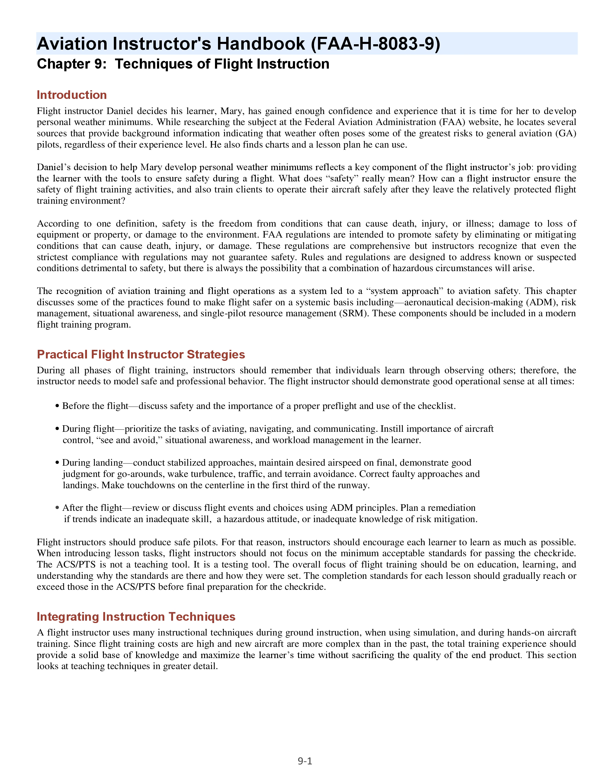Integrating instruction techniques. A flight instructor uses many instructional techniques during ground instruction, when using simulation, and during hands-on aircraft training. Since flight training costs are high and new aircraft are more complex than in the past, the total training experience should provide a solid base of knowledge and maximize the learner's time without sacrificing the quality of the end product. This section looks at teaching techniques in greater detail.

Ground instruction. Ground instruction can be highly effective if it follows an overall plan designed to prepare the learner for flight. In Chapter 7, Planning Instructional Activity, Figure 7-2 shows a ground lesson that includes clear objectives. However, ground training objectives should be related to flight training objectives whenever possible. When elements are taught on the ground as theory, their practice and application is also experienced in the air. The instructor should point out the connection between the theory and practice to maximize the benefit from integrated ground and flight instruction. Figure 9-1. Additionally, ground instruction need not be in the classroom for maximum effectiveness.

For example, conduct a pre-flight using an actual aircraft although initially taught in an academic setting. Additionally, when airspace is being taught, an invaluable reinforcement of training includes taking the learners to ATC facilities where they can see management of the National Airspace System (NAS) from another perspective. Studies have shown that a mix of instructional elements provides the best balance during ground instruction.

Learners who use electronic media extensively are generally not as well trained as those who receive a balanced mix of ground teaching methods that include e-learning, class, and one-on-one instruction integrated with technological tools that support the instruction versus replacing it. Ground instruction is a key element that sets the foundation and is critical to learner pilots becoming well educated and successfully transitioning into the flight environment.

It should be deliberative, supportive of the learner's interwoven flight education, and highly rewarding to both the learner and instructors alike. Use of flight simulation training devices. The FAA separates flight simulation trainers into three specific categories: full flight simulator, FFS, flight training device, FTD, aviation training device, ATD. The National Simulator Program located in Atlanta, Georgia provides for the evaluation and qualification of FFSs and FTDs.

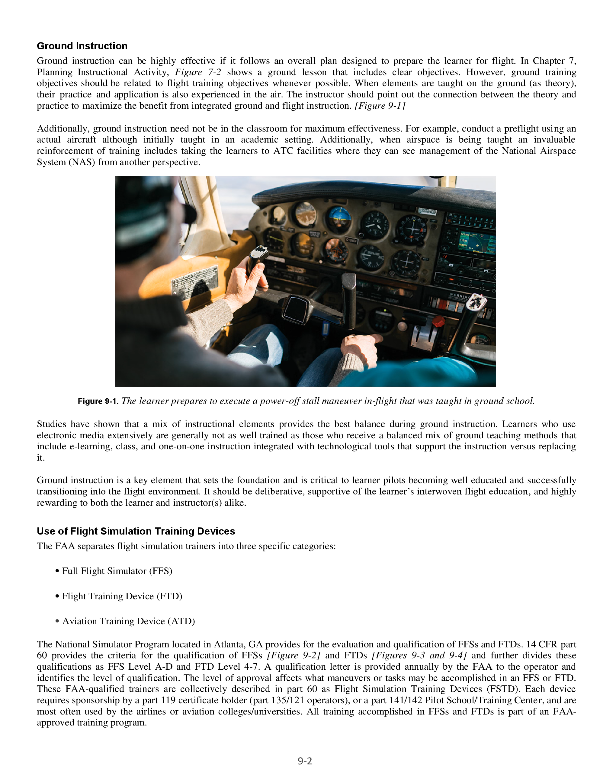Each device requires sponsorship by a Part 119 certificate holder, Part 135/121 operators, or a Part 141/142 pilot school/training center, and are most often used by the airlines or aviation colleges/universities. All training accomplished in FFSs and FTDs is part of an FAA-approved training program. The General Aviation and Commercial Division located in Washington, D.C. provides for the evaluation and approval of ATDs.

Advisory Circular AC 61-136, FAA Approval of Aviation Training Devices and Their Use for Training and Experience, provides the criteria for ATD approvals and use, and further divides them into two categories: basic or advanced ATD approvals, BATD/AATD. The letter of authorization provided by the FAA to the manufacturer specifies the training credits or experience requirements that can be acquired using that model trainer. These training devices are predominantly used by general aviation flight schools providing flight training under 14 CFR Part 61 or Part 141 regulations. ATDs cannot be used for airman practical tests or type rating training requirements.

Integrated training curricula can use an FFS, FTD, or ATD to provide seamless training from the classroom to the aircraft. An instructor initially provides the required knowledge in a classroom environment and then follows with procedural training in the simulator. For example, when utilizing an integrated ground and flight training program, an authorized instructor would initially teach the required knowledge specific to instrument landing system, ILS, design, and the associated flight operations through ground and classroom training. The instructor then provides instruction on aircraft flight procedures and details specific to operations in the National Airspace System. After the learner has gained the required knowledge and understands the procedures, the instructor then adds practicing the psychomotor skills of the task in the simulator.

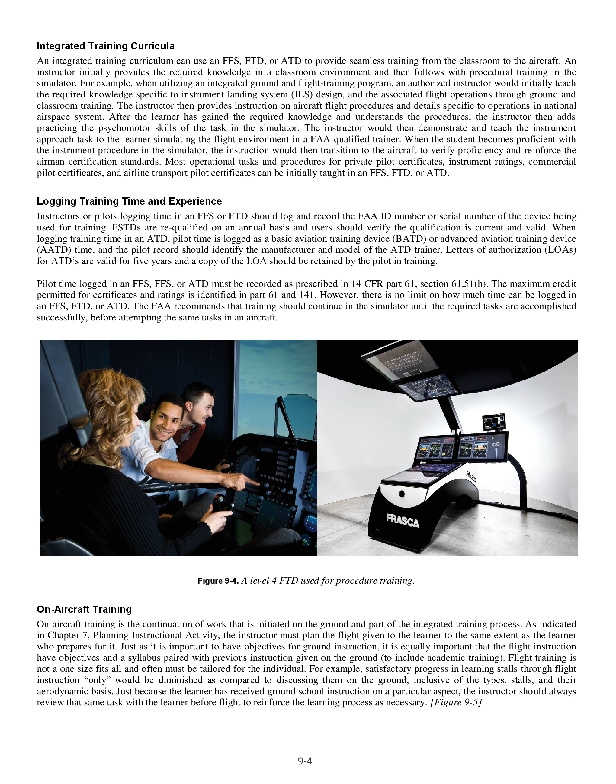Figure 9.5. On-aircraft training is integrated with ground instruction and not autonomously separate and distinct. By pairing flight and ground instruction together, the learner will advance further, faster, and attain more of the educational goals the instructor tries to impart. Demonstration Performance Training Delivery Method.

The demonstration performance training delivery method was discussed briefly in Chapter 5, the teaching process, but the following in-depth discussion is geared to the flight instructor. This training method has been in use for a long time and is very effective in teaching kinesthetic skills, so flight instructors find it valuable in teaching procedures and maneuvers. The demonstration performance method is divided into 4 phases: explanation, demonstration, learner performance with instructor supervision, and evaluation.

Figure 9.6, explanation phase. The flight instructor needs to be well prepared and highly organized to teach complex maneuvers and procedures effectively. The learner should be intellectually and psychologically ready for the learning activity. The explanation phase is accomplished prior to the flight lesson with a discussion of lesson objectives and completion standards, as well as a thorough pre-flight briefing. The instructor presents clear and pertinent objectives of the particular lesson to be presented, based on the known experience and knowledge of the learner. Instructors need to provide details on the lesson content, performance expectations, and evaluation measures.

When teaching a skill, the instructor conveys the precise actions the learner will perform. In addition to the necessary steps, the instructor should describe the end result of these efforts. The explanation phase also should include coverage of appropriate safety procedures. Before leaving this phase, the instructor should encourage learners to ask questions about any step of the procedure that they do not understand. Demonstration phase.

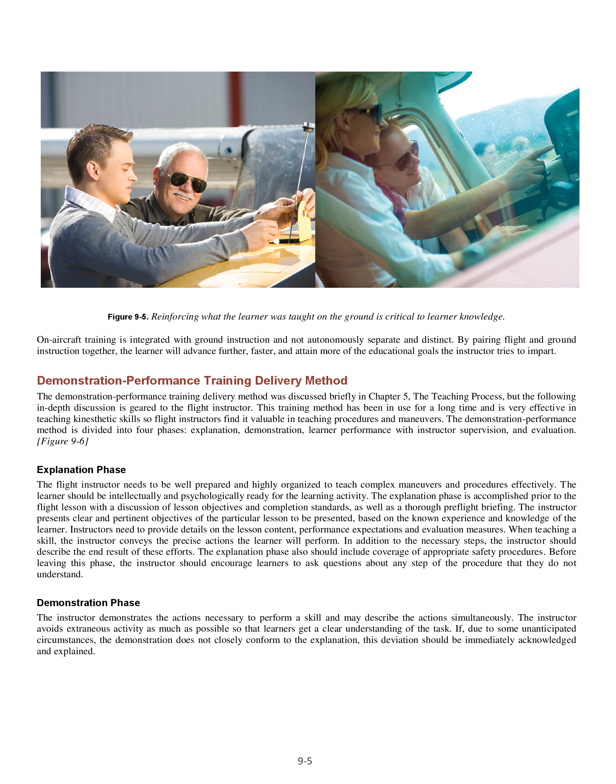The instructor demonstrates the actions necessary to perform a skill and may describe the actions simultaneously. The instructor avoids extraneous activity as much as possible so that learners get a clear understanding of the task. If, due to some unanticipated circumstances, the demonstration does not closely conform to the explanation, this deviation should be immediately acknowledged and explained. Learner performance and instructor supervision phases.

As discussed in Chapter 5, the teaching process, these 2 phases involve separate actions that are performed concurrently. The first of these phases is the learner's performance of the physical or mental skills that have been explained and demonstrated. The second activity is the instructor's supervision. Learner performance requires learners to act and do. To gain skills, learners must practice. The instructor must, therefore, allot enough time for meaningful activity. Through doing, learners can follow correct procedures and reach established standards.

It is important that learners be given an opportunity to perform the skill as soon as possible after a demonstration. Then, the instructor reviews what has been covered during the instructional flight and determines to what extent the learner has met the objectives outlined during the pre-flight discussion. The instructor should be satisfied that the learner is well prepared and understands the task before starting. The instructor observes as the learner performs, and then makes appropriate comments.

Evaluation phase. In this phase, the instructor traditionally evaluates learner performance, records the learner's performance, and verbally advises the learner of the progress made toward the objectives. Regardless of how well a skill is taught, there may still be performance deficiencies. When pointing out areas that need improvement, offer concrete suggestions that help. If possible, avoid ending the evaluation on a negative note.

As discussed in Chapter 6, Assessment, Collaborative Assessment, or Learner-Centered Grading, LCG, is a form of authentic assessment currently used in aviation training with problem-based learning, PBL. PBL structures the lessons to confront learners with problems that are encountered in real life and forces them to reach real-world solutions. Scenario-based training, SBT, a type of PBL, uses a highly structured script of real-world experiences to address aviation training objectives in an operational environment.

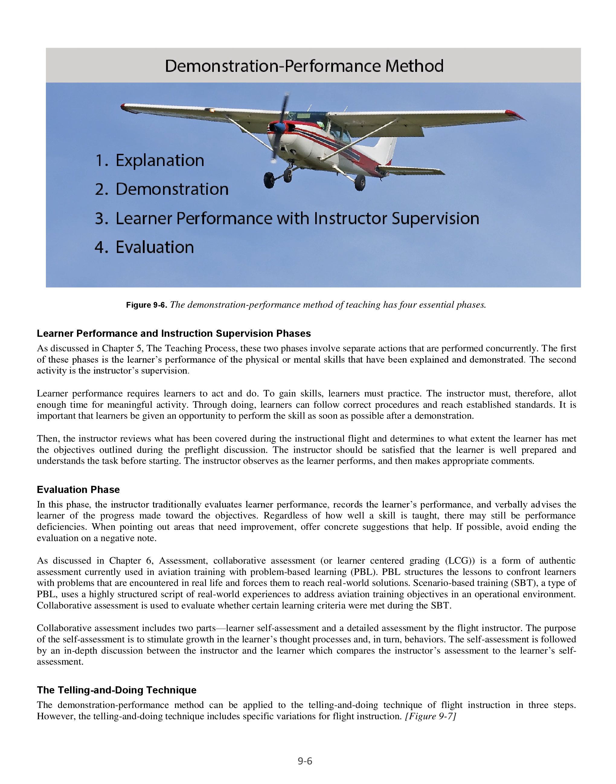The demonstration performance method can be applied to the telling and doing technique of flight instruction in 3 steps. However, the telling and doing technique includes specific variations for flight instruction. Figure 9.7. Instructor tells, instructor does. First, the flight instructor gives a carefully planned demonstration of the procedure or maneuver with accompanying verbal explanation.

While demonstrating in-flight maneuvers, the instructor should explain the required power settings, aircraft attitudes, and describe any other pertinent factors that may apply. This is the only step in which the learner plays a passive role. It is important for the demonstration to conform to the explanation as closely as possible. In addition, it should be demonstrated in the same sequence in which it was explained so as to avoid confusion

and provide reinforcement. Since learners generally imitate the instructor's performance, the instructor needs to demonstrate the skill exactly the way the learners are expected to practice it, including all safety procedures that should be followed. As previously explained, if the demonstration does not closely conform to the explanation, this deviation should be immediately acknowledged and explained. Most physical skills lend themselves to a sequential pattern where the skill is explained in the same step-by-step order normally used to perform it.

When the skill being taught relates to previously learned procedures or maneuvers, the known to unknown strategy may be effective. When teaching more than one skill at the same time, the simple to complex strategy works well. By starting with the simplest skill, a learner gains confidence and is less likely to become frustrated when building skills that are more complex.

Another consideration in this phase is the language used. Instructors should attempt to avoid unnecessary jargon and technical terms that their learners do not know. Instructors should also take care to clearly describe the actions learners are expected to perform. Communication is the key. It is neither appropriate nor effective for instructors to try to impress learners with their expertise by using language that is unnecessarily complicated.

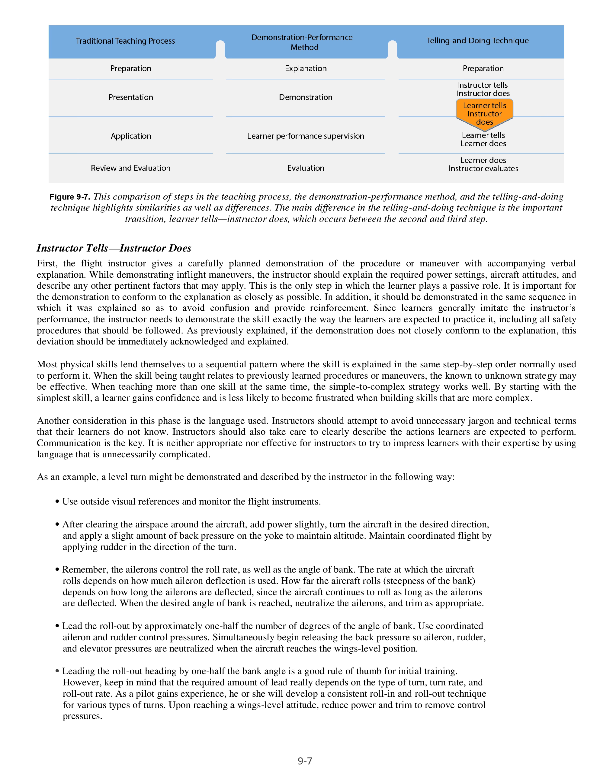Learner tells, instructor does. Second, the learner tells as the instructor does. In this step, the learner actually plays the role of instructor, telling the instructor what to do and how to do it. Two benefits accrue from this step: the learner, being freed from the need to concentrate on performance of the maneuver and from concern about its outcome, is able to organize his or her thoughts regarding the steps involved and the techniques to be used.

In the process of explaining the maneuver as the instructor performs it, perceptions begin to develop into insights. Mental habits begin to form with repetition of the instructions previously received. Plus, the instructor is able to evaluate the learner's understanding of the factors involved in performance of the maneuver.

According to the principle of primacy, it is important for the instructor to make sure the learner gets it right the first time. The learner should also understand the correct sequence and be aware of safety precautions for each procedure or maneuver. If a misunderstanding exists, it can be corrected before the learner becomes absorbed in controlling the aircraft.

Learner tells, learner does. Application is the third step in this method. This is where learning takes place and where performance habits are formed. If the learner has been adequately prepared and the procedure or maneuver fully explained and demonstrated, meaningful learning occurs.

The instructor should be alert during the learner's practice to detect any errors in technique and to prevent the formation of faulty habits. At the same time, the learner should be encouraged to think about what to do during the performance of a maneuver, until it becomes habitual. In this step, the thinking is done verbally.

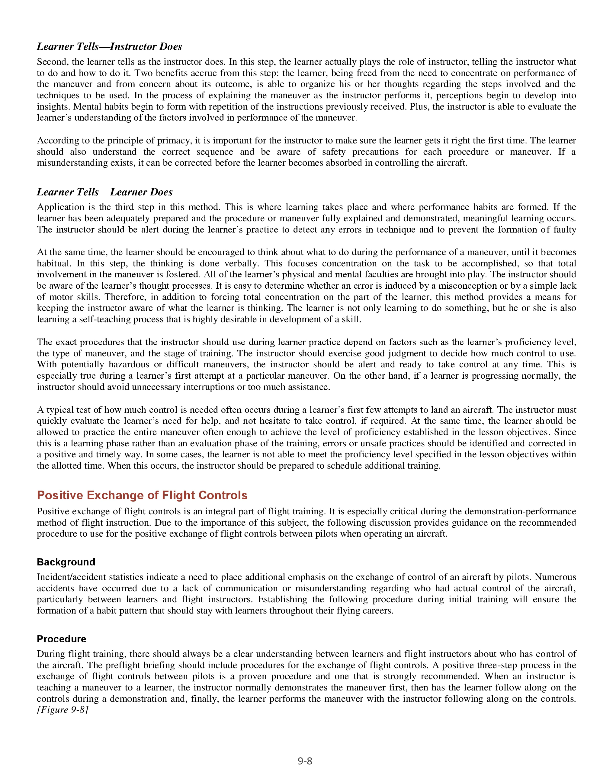There should always be a clear understanding between learners and flight instructors about who has control of the aircraft. The pre-flight briefing should include procedures for the exchange of flight controls. A positive three-step process in the exchange of flight controls between pilots is a proven procedure and one that is strongly recommended. When an instructor is teaching a maneuver to a learner, the instructor normally demonstrates the maneuver first, then has the learner follow along on the controls during a demonstration and, finally, the learner performs the maneuver with the instructor following along on the controls.

Figure 9.8. Flight instructors should always guard the controls and be prepared to take control of the aircraft. When necessary, the instructor should take the controls and calmly announce, "I have the flight controls." If an instructor allows a learner to remain on the controls, the instructor may not have full and effective control of the aircraft. Anxious learners can be incredibly strong and usually exhibit reactions inappropriate to the situation. If a recovery is necessary, there is absolutely nothing to be gained by having the learner on the controls and having to fight for control of the aircraft.

Learners should never be allowed to exceed the flight instructor's limits. Flight instructors should not exceed their own ability to perceive a problem, decide upon a course of action, and physically react within their ability to fly the aircraft.

Sterile Flight Deck Rule. Commonly known as the Sterile Flight Deck Rule, Title 14 of the Code of Federal Regulations, 14 CFR, Part 121, Section 121.542 requires airline flight crew members to refrain from non-essential activities during critical phases of flight. As defined in the regulation, critical phases of flight are all ground operations involving taxi, takeoff, and landing, and all other flight operations below 10,000 feet except cruise flight.

Non-essential activities include such activities as eating, reading a newspaper, or chatting. A series of aircraft accidents caused by flight crews who were distracted from their flight duties during critical phases of the flight caused the FAA to propose the rule. While the regulation grew out of accidents in the airline industry, it holds true for the entire aviation community.

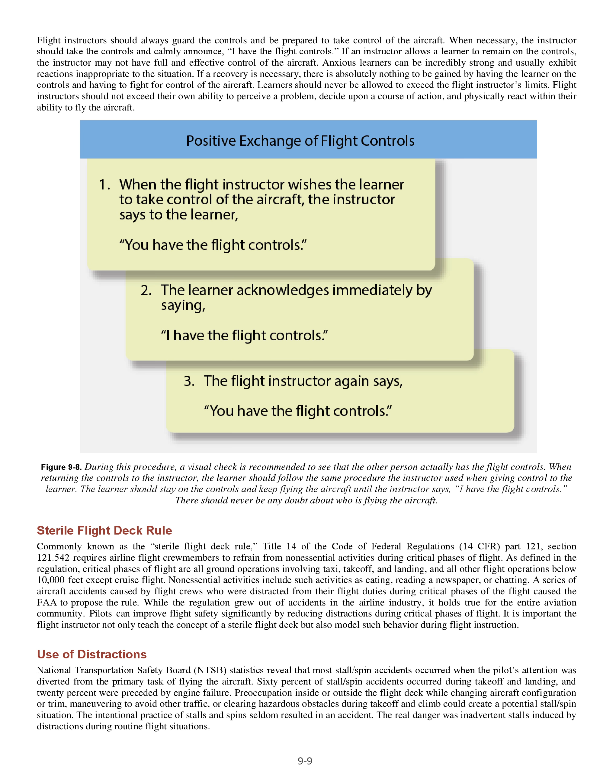The intentional practice of stalls and spins seldom resulted in an accident. The real danger was inadvertent stalls induced by distractions during routine flight situations. Pilots at all skill levels should be aware of the increased risk of entering into an inadvertent stall or spin or the possibility of an upset while performing tasks that are secondary to controlling the aircraft.

The FAA has established a policy for use of certain distractions on practical tests for pilot certification. The purpose is to determine that applicants possess the skills required to cope with distractions while maintaining the degree of aircraft control required for safe flight. The most effective training is the simulation of scenarios that can lead to inadvertent stalls by creating distractions while the learner is practicing certain maneuvers.

Instructor responsibilities include teaching the learner to divide his or her attention between the distracting task and maintaining control of the aircraft. The following are examples of distractions that can be used for this training. Drop a pencil. Ask the learner to pick it up. Ask the learner to determine a heading to an airport using a chart. Ask the learner to reset the clock. Ask the learner to get something from the back seat.

Ask the learner to read the outside air temperature. Ask the learner to compute true airspeed with a flight computer. Ask the learner to identify terrain or objects on the ground. Ask the learner to identify a field suitable for a forced landing. Have the learner climb 200 feet and maintain altitude, then descend 200 feet and maintain altitude. Have the learner reverse course after a series of S-turns.

It is a flight instructor's responsibility to teach the learner how to take charge during a flight. A pilot in command, PIC, must know when to tell any passengers, even a designated pilot examiner, DPE, when the PIC finds actions in the aircraft that distract and interfere with the safe conduct of the flight.

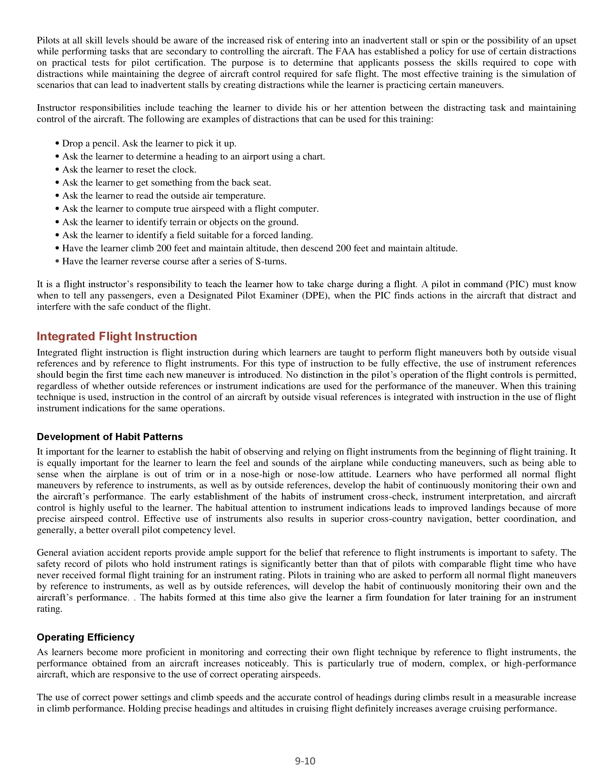Holding precise headings and altitudes in cruising flight definitely increases average cruising performance. The use of integrated flight instruction provides the learner with the ability to control an aircraft in flight for limited periods if outside references are lost. In an emergency, this ability could save the pilot's life and those of the passengers.

During the conduct of integrated flight training, the flight instructor needs to impress on the learners and ascertain they understand that the introduction to the use of flight instruments does not prepare them for operations in marginal weather or instrument meteorological conditions, IMC. According to NTSB accident data, in-flight encounters with weather, attempting VFR flight into IMC, is one of the most common causes of fatalities.

Procedures. Integrated flight instruction begins with the first briefing on the function of the flight controls. This briefing includes the instrument indications to be expected, as well as the outside references to be used to control the attitude of the aircraft. Each new flight maneuver is introduced using both outside and instrument references, with learners developing the ability to maneuver an aircraft equally as well by instrument or outside references.

They naturally accept the fact that the manipulation of the flight controls is identical, regardless of which references are used to determine the attitude of the aircraft. This practice should continue throughout the flight instruction for all maneuvers. To fully achieve the demonstrated benefits of this type of training, the use of visual and instrument references must be constantly integrated throughout the training. Failure to do so lengthens the flight instruction necessary for the learner to achieve the competency required for a private pilot certificate.

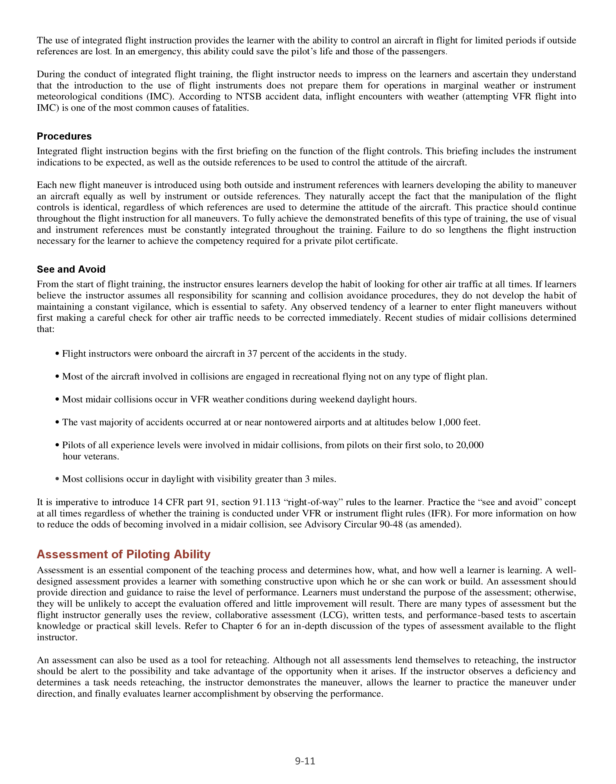If the instructor observes a deficiency and determines a task needs reteaching, the instructor demonstrates the maneuver, allows the learner to practice the maneuver under direction, and finally evaluates learner accomplishment by observing the performance. Demonstrated ability. Assessment of demonstrated ability during flight instruction must be based upon established standards of performance, suitably modified to apply to the learner's experience and stage of development as a pilot. The assessment must consider the learner's mastery of the elements involved in the maneuver, rather than merely the overall performance.

In order for a learner to be signed off for a solo flight, the instructor needs to determine that the learner is qualified and proficient in the flight tasks necessary for the flight. The instructor bases this assessment on the learner's ability to demonstrate consistent proficiency on a number of flight maneuvers. Pilot skill evaluations occur during the conduct of courses at FAA-approved schools, and teaching instructors should verify that learners meet the proficiency requirements prior to sending them for any stage check.

Post-flight evaluation and assessing piloting ability. It is important for the flight instructor to keep the learner informed of progress. This may be done as each procedure or maneuver is completed or summarized during post-flight critiques. Post-flight critiques should be in a written format, such as notes to aid the flight instructor in covering all areas that were noticed during the flight or lesson.

Traditionally, flight instructors explained errors in performance, pointed out elements in which the deficiencies were believed to have originated and, if possible, suggested appropriate corrective measures. Traditional assessment depends on a grading scale of excellent, good, fair, poor or exceeds standards, meets standards, needs more training, which often meets the instructor's needs but not the needs of the learner.

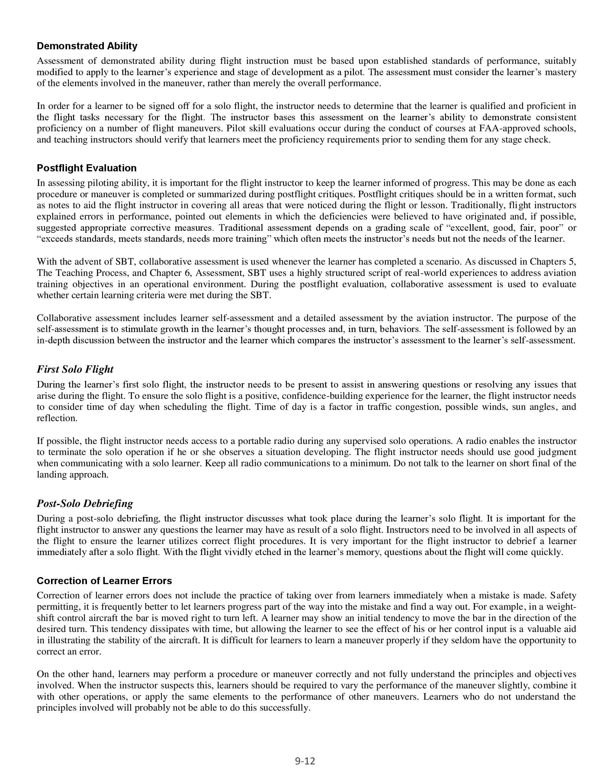Pilot supervision. Flight instructors have the responsibility to provide guidance and restraint with respect to the solo operations of their learners. This is by far the most important flight instructor responsibility. The flight instructor is the only person in a position to make the determination a learner is ready for solo operations. Before endorsing a learner for solo flight, the instructor should require the learner to demonstrate consistent ability to perform all of the fundamental maneuvers.

Dealing with normal challenges. Instructors should teach learners how to solve ordinary problems encountered during flight. Traffic pattern congestion, change in active runway, or unexpected crosswinds are challenges the learner masters individually before being able to perform them collectively.

Visualization. SBT lends itself well to visualization techniques. For example, have a learner visualize how the flight may occur under normal circumstances, with the learner describing the progress of the flight. Then, the instructor adds unforeseen circumstances such as a sudden change in weather that brings excessive winds during final approach. Other examples of SBT can have the instructor adding undesired landing sites for balloon learner pilots, rope breaks for glider learners, and radio outages for instrument airplane learners.

Now, the learner gets to visualize how to handle the unexpected change. During this visualization, the flight instructor can ask questions to check the learner's thought processes. The job of the instructor is to challenge the learner with realistic flying situations without creating an overburdening unrealistic scenarios.

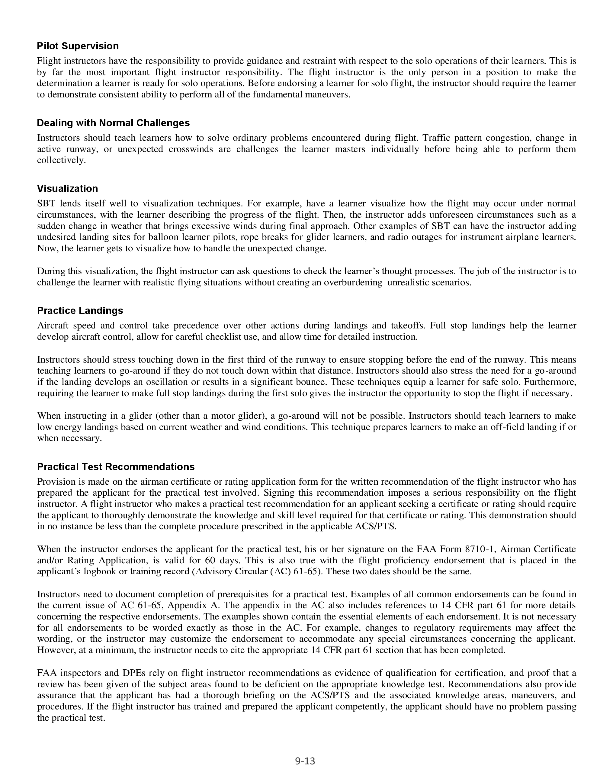If a flight instructor fails to ensure a learner pilot or additional rating pilot meets the requirements of regulations prior to making endorsements to allow solo flight or additional rating, that instructor is exhibiting a serious deficiency in performance. The FAA may hold that instructor accountable. Providing a solo endorsement for a learner pilot who is not proficient for solo flight operations, or providing an endorsement for an additional rating for a pilot not meeting the appropriate regulatory requirements also represents a breach of faith with the learner or applicant.

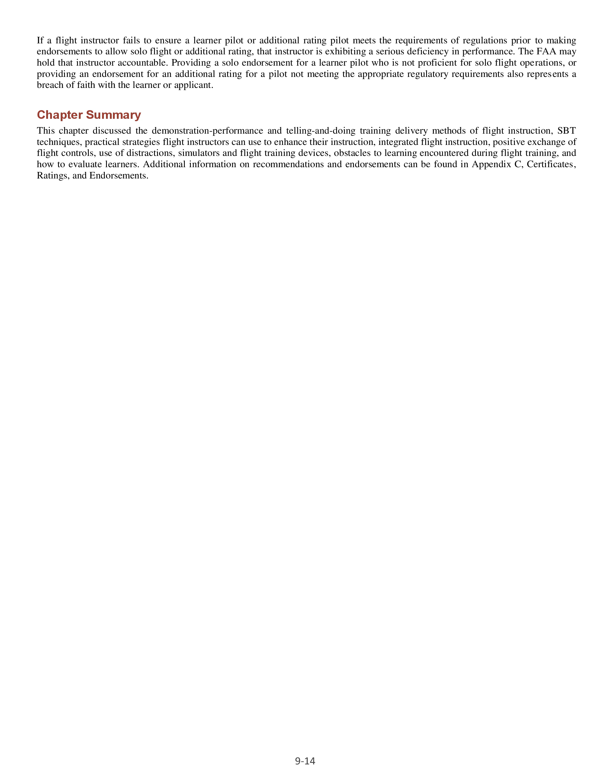Chapter Summary. This chapter discussed the demonstration performance and telling and doing training delivery methods of flight instruction, SBT techniques, practical strategies flight instructors can use to enhance their instruction, integrated flight instruction, positive exchange of flight controls, use of distractions, simulators and flight training devices, obstacles to learning encountered during flight training, and how to evaluate learners. Additional information on recommendations and endorsements can be found in Appendix C, Certificates, Ratings, and Endorsements.